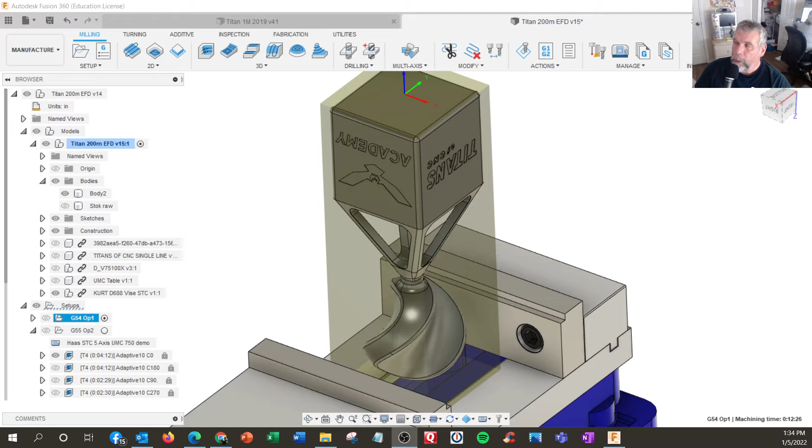I'm going to virtually machine my Titan 200M here. I think I was calling it a 140M mistakenly, but I installed my vise right here, and I have my material. So that's kind of how it would be set up, some kind of vise there. I click this here to orient it the way I want.

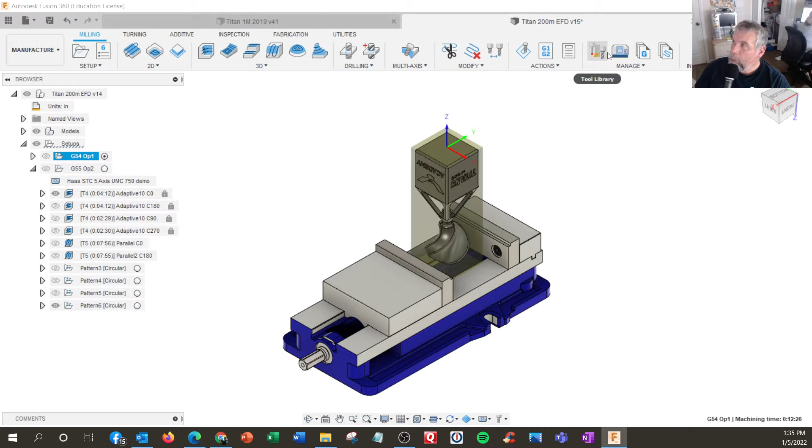And I'm going to bring in a machine now. So I go to simulate right here. Installed in the machine, and the UMC 750 universal 5-axis machine is my material right there.

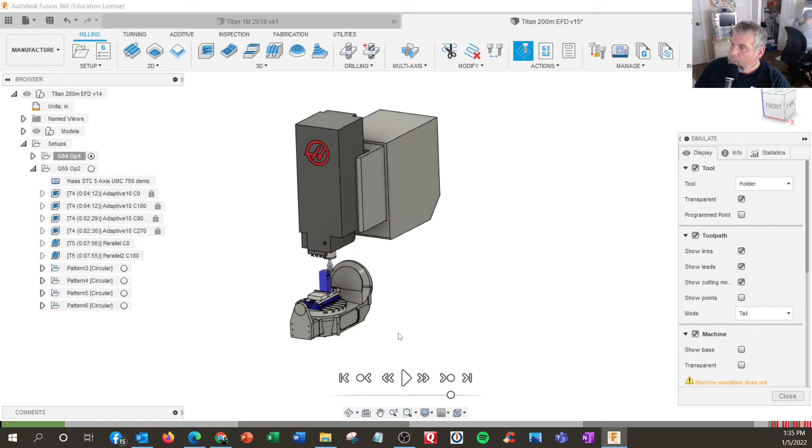I'm just going to make it transparent, or I'll just show the nuts and bolts here. So we've got a face mill, the tilting axis. The tilting one is the B axis, the rotating one is the C axis. So this is in the B0, C0 position right now.

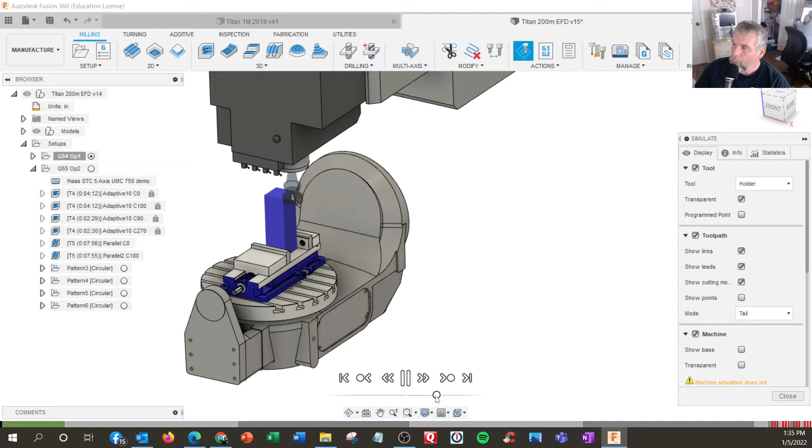And I'm doing operation 1, which is the upper part of the square part. Let's simulate. Oh, pretty slow. All right, it's going to machine the top, then flip this way and make sure we have clearance here.

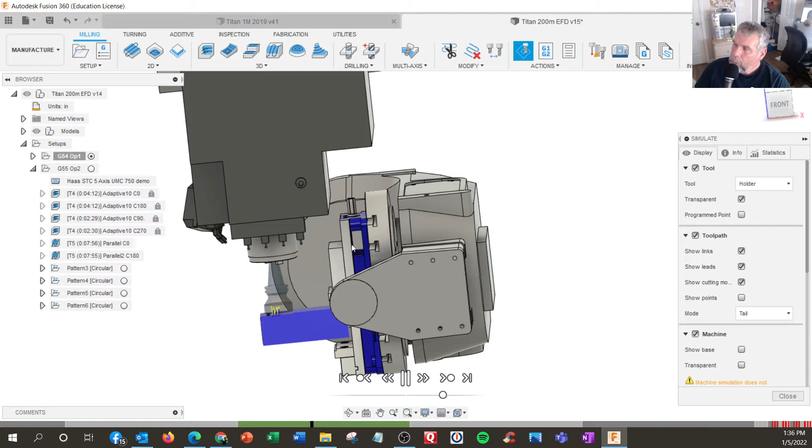So this would be rotated to the B90 position, I believe, and then it just rotates the C. And of course you want to be sure you have clearance moves, so in between I could tell in the code that it goes all the way to home before it rotates again.

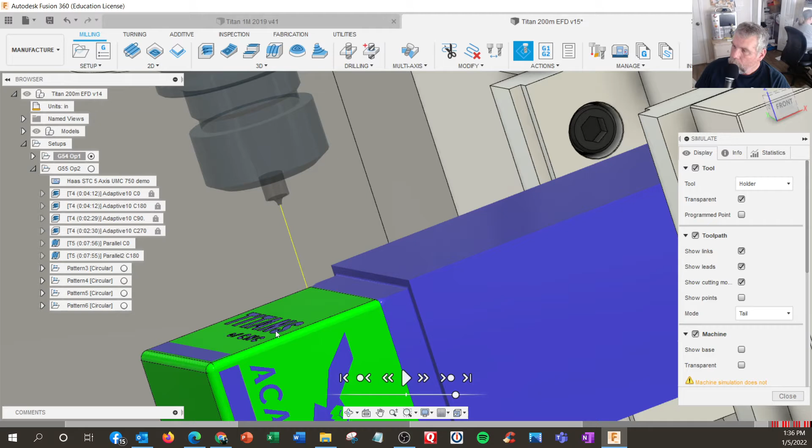All right, so we got all the faces, and then there's the corner radius tool right there, which is right there. So this is the end of operation 1.

All right, let's flip to operation 2, which is now upside down. And I just used a different vise. This is called a self-centering vise. It's got some dovetails here. So imagine we had machined a dovetail, but we wouldn't do that on this one.

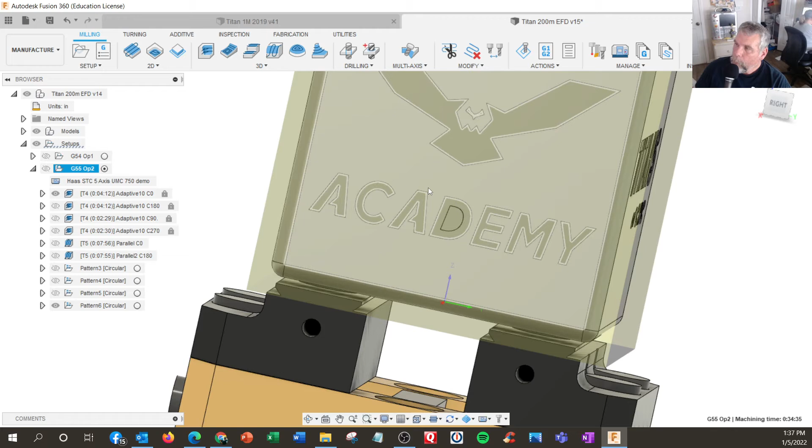We would actually be clamping on the square part. So in reality, it's probably a better simulation with the Kurt vise, because you could stick it right in the vise, clamp around the sides, and machine the rest. This will be good for simulation purposes though.

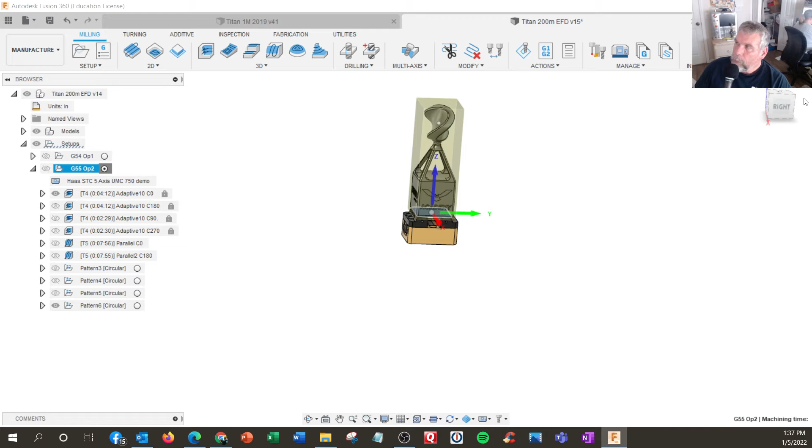So I'm going to switch machines here. Right here you go into the library, the Big Fusion library. I had already downloaded my simulation machines. Right here I have a 750, UMC 750 right here, or I can do a 500. Hit select. Hit OK.

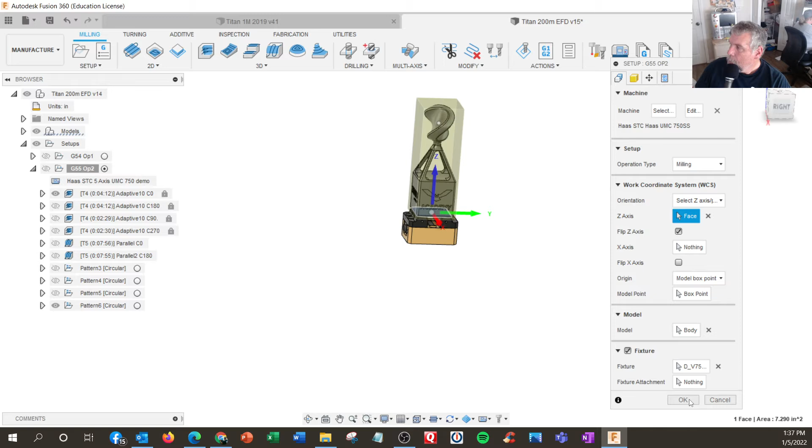That's in my setup area. And when I go to simulate the machine, I simulate the actions. This takes a second here.

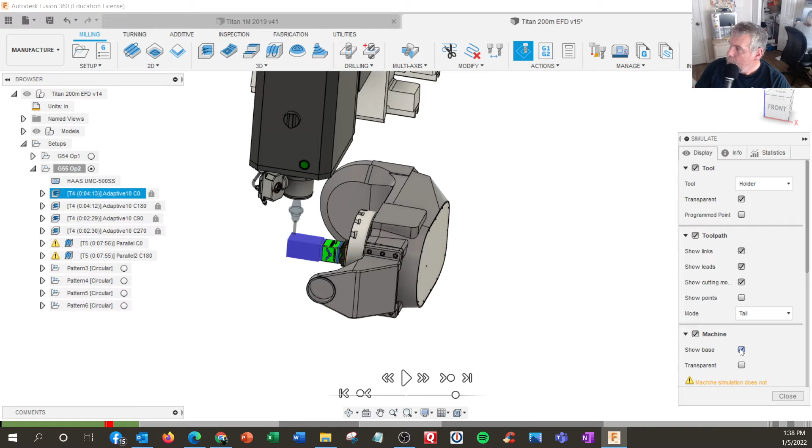This is the 500. Let's turn the whole machine on here. There it is. Turn it back on again. So there's a difference between selecting a machine for producing code and selecting a machine for just doing simulation.

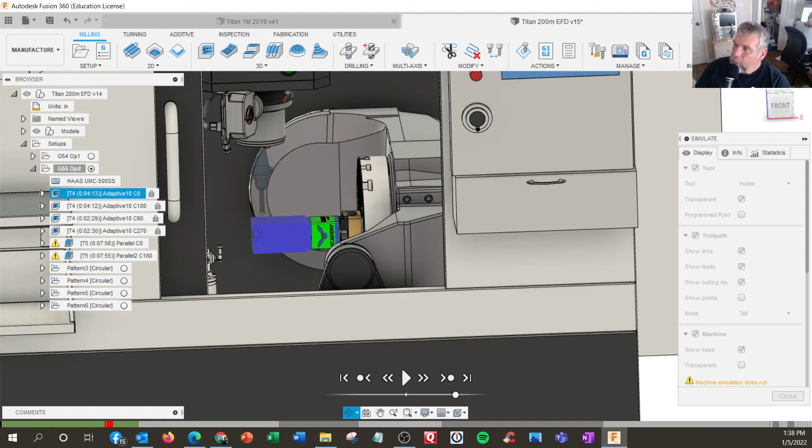Okay, so it's starting in the tilted position. The first operation is done, and we're going to work on this side. All right, let's hit play. Whoops, a little bit fast there. This is all adaptive clearing from the side. Then it'll rotate 180 degrees.

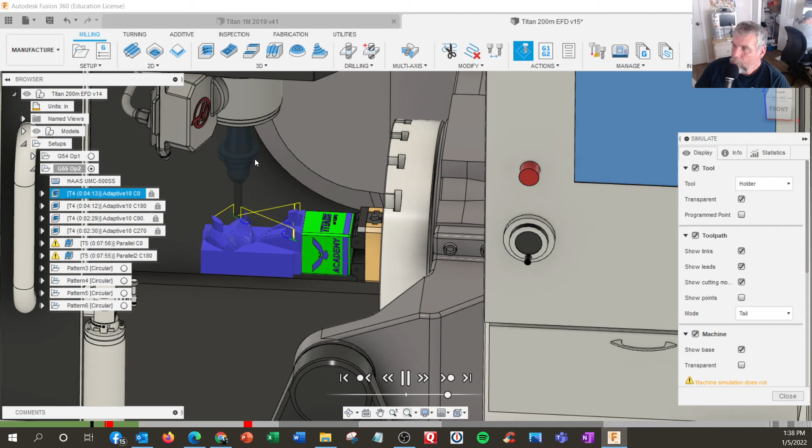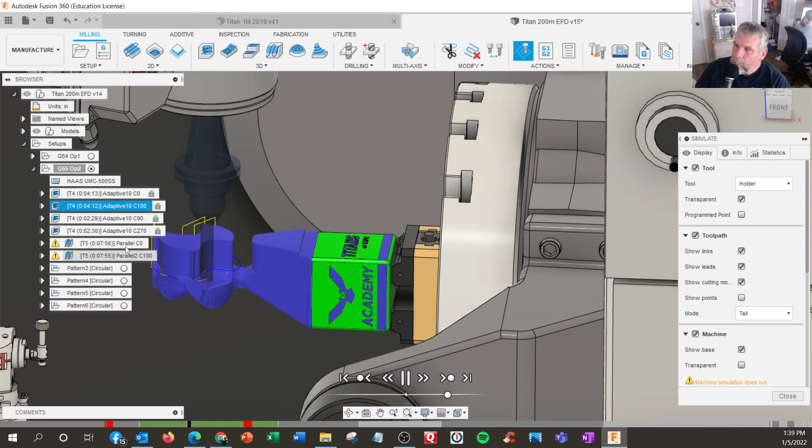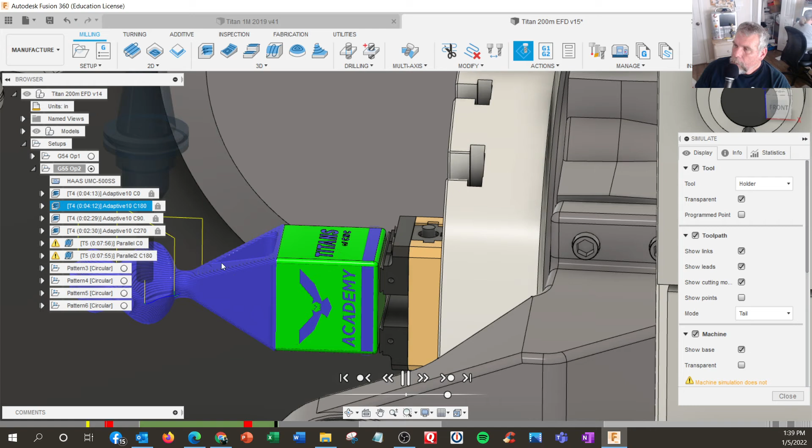So all the stuff we learned from Titan, it's all in this program. We don't want it cutting there, that's for sure. So I think we've got to update the boundary or the stock size, because this side already does that. We don't want to be cutting anywhere on the right.

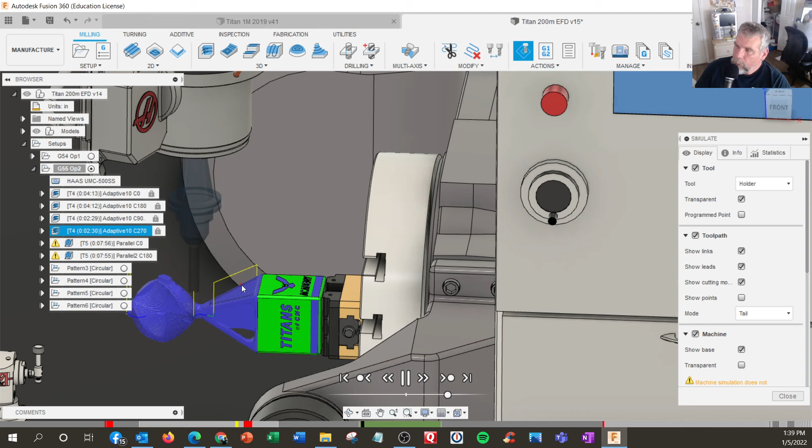That's pretty much the way it would be. Tilted, and then it's going to tilt to do the face mill with this tilted up.

Let's just jump ahead. This takes a little bit of simulation time, because the 3-axis stuff is a lot of code.

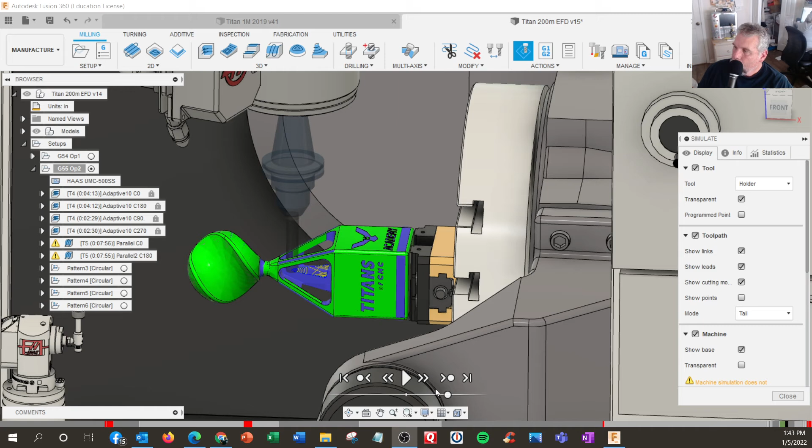Okay, we continue on. I had to jump over the 3D contouring section. Roughing the inside and finishing the inside. So it's roughing and contour machining.

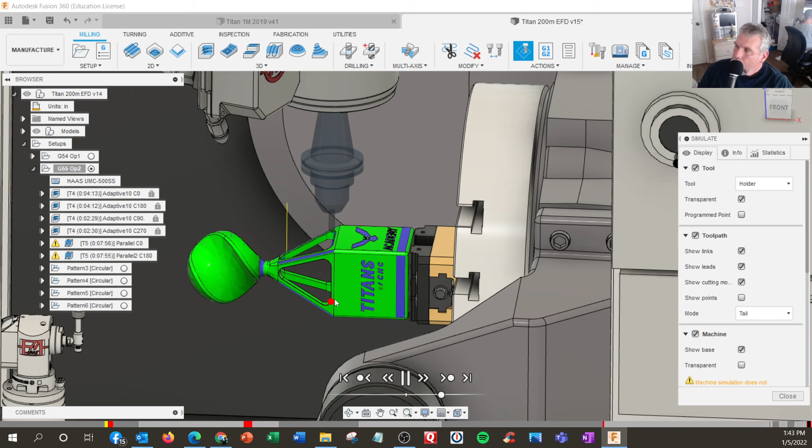I think I missed the face mill. That's the trace one for the chamfering. And there we are right there.

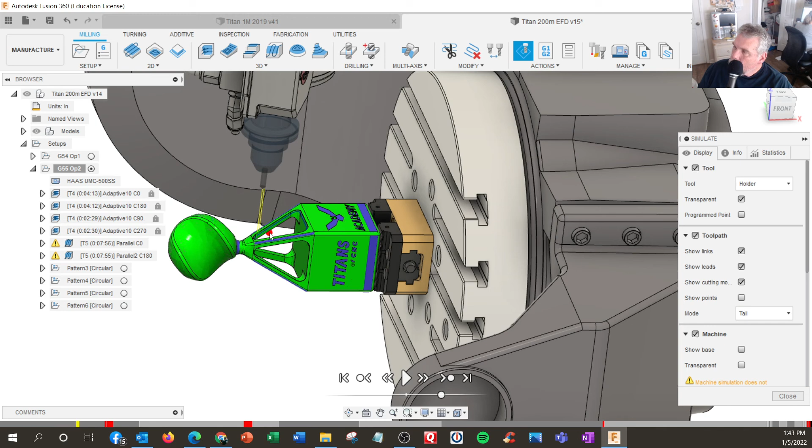All right, let me put the machine off so we can look at it. Oh, I didn't get the flow, the multi-axis flow thing. It's almost complete. That's pretty much what we're looking at as far as in whatever kind of machine you're using.

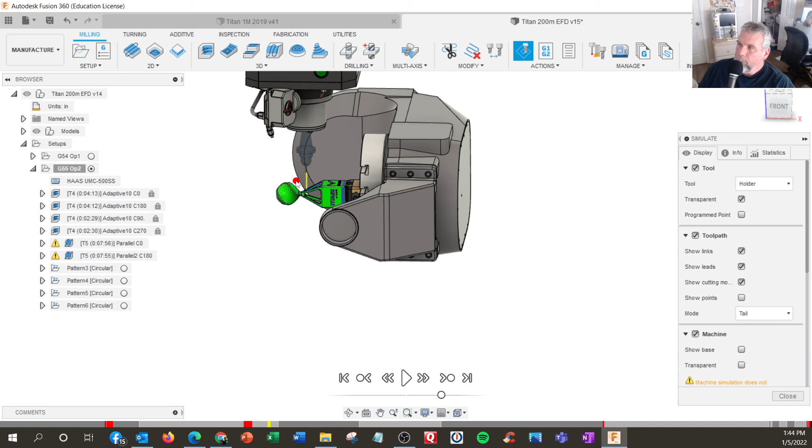UMC is pretty popular now. The 500 is a smaller platter than a 750. I think it's in millimeters on diameter. It's funny that Haas is all American, all US, but they still have some metric in there.